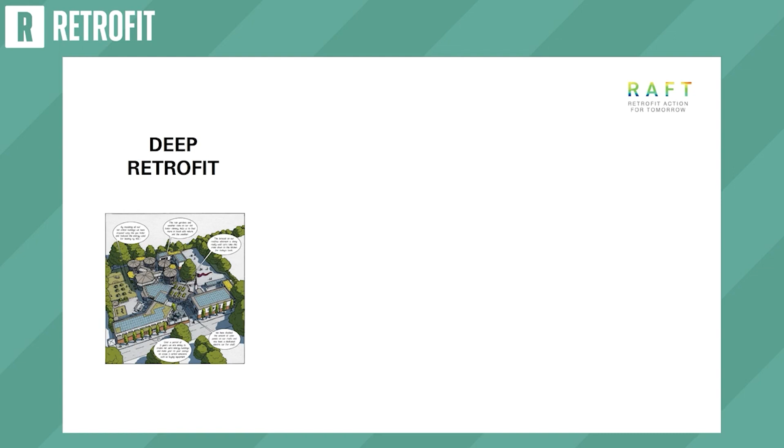So we're a practice of 22 people. We have a hybrid home office working setup. We have employees in Leeds and Birmingham and Southampton, and we're based in County Hall with sustainable workspaces in Lambeth. So you can describe what we do in three key phrases. The first one is deep retrofit, and we deliver deep retrofit projects at an estate scale.

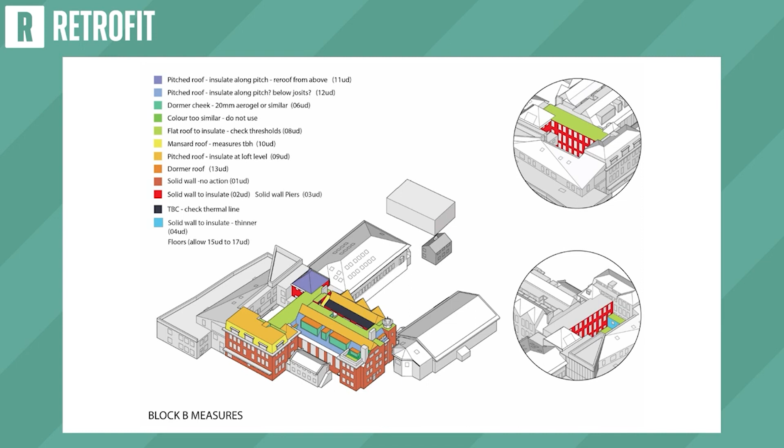This is an example of how we might deal with one block, and this was funded through PSDS1, and we've actually completed this retrofit. It's a whole building retrofit. It's a kind of pragmatic approach. It's not EnerPHit. It doesn't have floor insulation, but it does have moisture management. It does have MVHR. It has repointed cavity walls, cavity wall insulation. Single glazing was replaced with triple glazing, but it was cost effective.

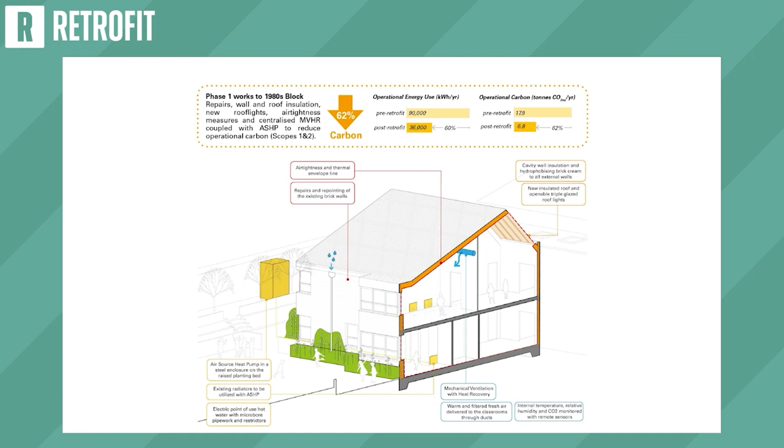It was achievable within PSDS1 budgets with a little bit extra from the council. PSDS1 was more money than PSDS3. It's now lower, so you can't do this anymore. Unfortunately, you have to get additional funding.

And I've put this slide in because we're working right from the estate scale all the way down to the detail, and we really care about repointing. We don't want to be installing cavity wall insulation without making sure that the walls are ready to take it and that we're going to get long-term good building performance. So the second key phrase to describe what we do is community engagement. And I think that this is really a very core part of what we do.

We love working with schools and with children. It's basically fun, and we just feel that we deliver our plans and we deliver them with action research with the children, and it means they learn more, the whole school community learns more, and then we can get a ripple effect out beyond into the community.

And my best moment in 2022 was when a parent called me up and just said, just want to let you know that last night we were talking about retrofit at the kitchen table, and for me that's what it's about. We want to reach out beyond the school.

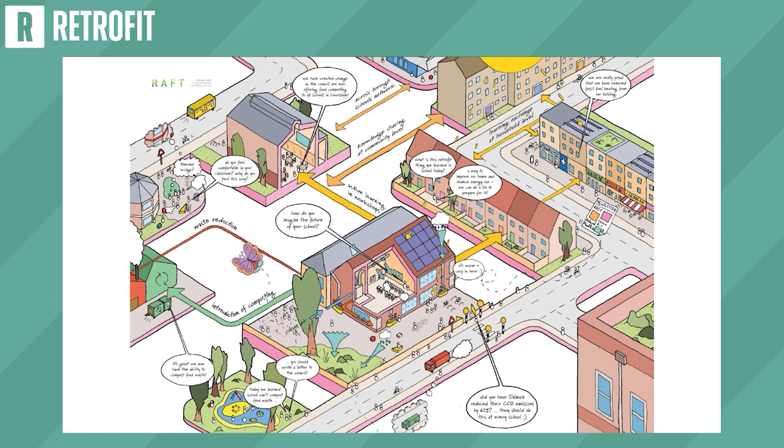We've mapped what that school community sort of looks like, and we're sort of thinking about how we can connect with all these people. And this is a drawing that we did for the recent MacEwen Awards to try and describe the way in which we're reaching out into the community. So this talks about all those effects from the school beyond.

Some of you might have heard about this. This is the Hot Baked Potato Challenge. So this is about teaching principles of retrofit to children with a bit of fun. So we get natural insulation materials, and we get a thermographic camera and a digital thermometer to make it kind of technical. And we teach them basically about thermal continuity and the performance of buildings.

We've got lots of FLIR C5 thermal cameras that we share amongst the children. We've got exercises such as Follow the Heat, where we say, where's the heat source in your classroom? And they all rush off and try and find it, and then we say, right, we're going to follow it. So we follow it down corridors, through rooms, and we go all the way back to the boiler room, and we stand in the boiler room, we say, right, where's the gas coming from?

And then we sort of have this wider discussion about fossil fuels and the relationship of the school to the wider world. We do a waste audit, and the children at this school are still talking about that apple, a year and a half later.

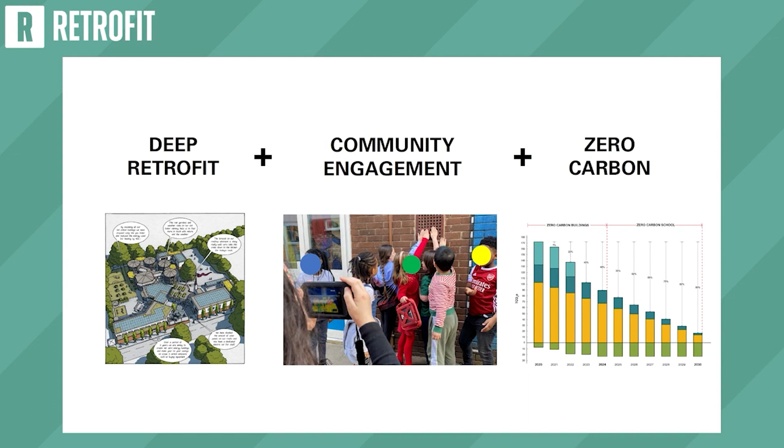So then the final part is zero carbon, and you've got scope 1 as the light blue, scope 2 is the dark blue, and scope 3 is the yellow. The yellow, as you can see, is a really significant part. Scope 3 emissions, the purchasing at schools. So we feel that we want to be addressing that. We're in a really good place to address that and to support schools on that journey, and that aligns with the Ashden Let's Go Zero 2030 campaign, which we support.

I was asked to talk about the genesis of RAFT, so this is a very quick how did this all come about? So it started with about 10 years of deep retrofit experience on domestic properties, and they range from listed buildings all the way through to modern buildings that also are quite problematic. My house is the one that's 1978, and my mum's house is the 1920.

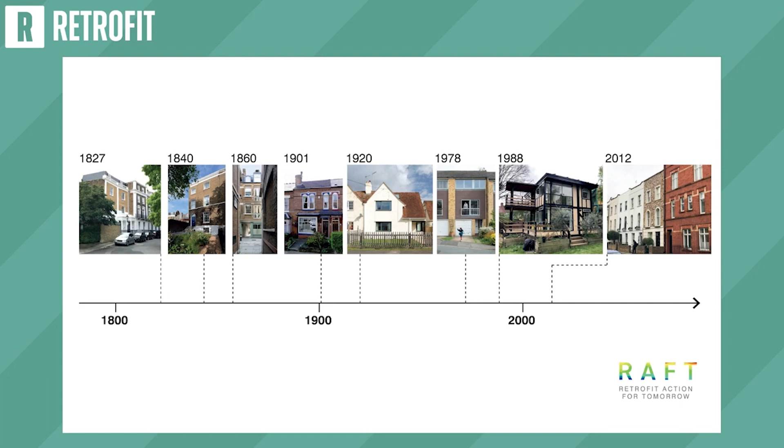And the 1840, some of you might know, it's on the Historic England website, and it was a retrofit. It's Rectory Grove. It's a Grade 2 listed house. And that's actually really where I started retrofit, kind of on that journey.

This is my house. It's a step-by-step EnerPHit project, and we're kind of well on the way. We're actually now net zero carbon. We're producing more energy from our solar panels than we actually use over the year. We have an air source heat pump, so we're in a sort of really wonderful spot at the moment.

He engaged with the retrofit process, and that was the key. I suddenly realized that him engaging with the step-by-step retrofit of the house was a kind of light bulb moment of thinking, wow, we could actually do this with a school, and we can actually engage children, and they do find it interesting. Empowering them to make change in their schools is a good thing, and why should they not understand what pipes are on ceilings and what the build-up of a wall is? You know, it's interesting to them.

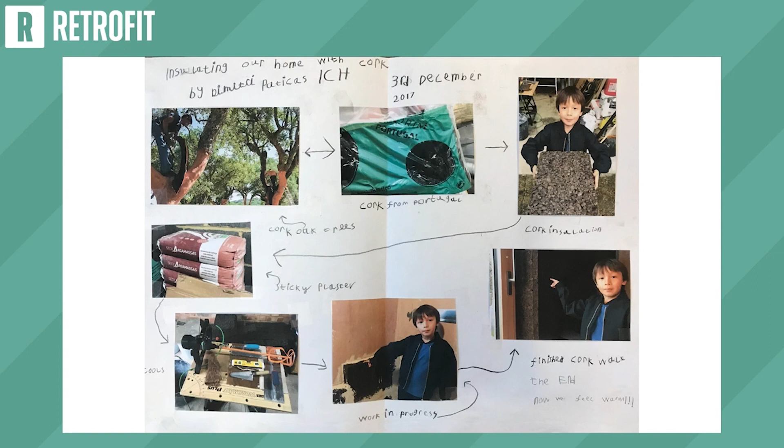We then went on the climate march, the really big one, and our poster says, "Retrofit your home and life." I then started doing workshops, and this is the hot baked potato challenge with the different materials: it's got cork, sheep's wool, recycled polyester and wood fibre, and we just played with them and gave them some basic rules.

Then started working with Lewisham, so suddenly went from working on quite small domestic properties to big complicated schools with multiple periods of construction and much more complex programs. So I was asked to briefly summarize what we're discovering. So this is a sort of romp through things that we found.

The first one that we found is that if we package together what we're calling the RAFT pragmatic approach of medium-term work, so works that are relatively fundable through current funding, we can actually cut carbon emissions by about 60% on a kind of consistent basis across schools.

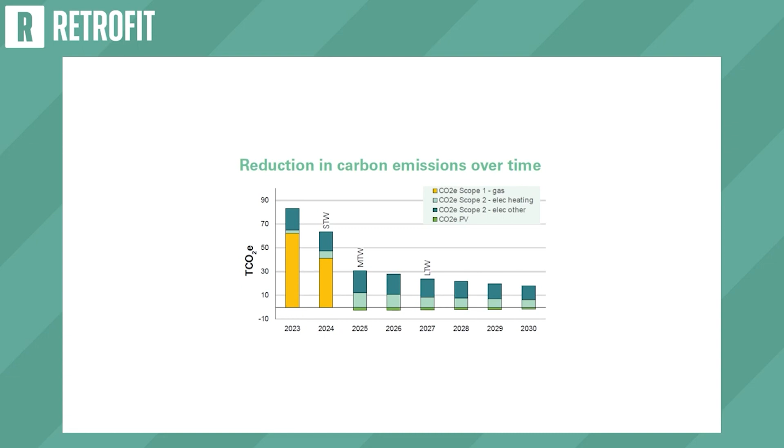If we spend another £1 million or another £2 million, we might cut another 5% carbon, and that just does not seem worth it. So generally speaking, external wall insulation and internal wall insulation are out. Renewing windows, keeping double glazing in makes sense. So we're sort of adopting this pragmatic approach that does significant reduction in carbon but doesn't cost the earth.

We're finding a lot of modern construction is just as bad as anything. This is a brand new roof, and the white is massive air leakage. It's actually holes that big in a warm roof.

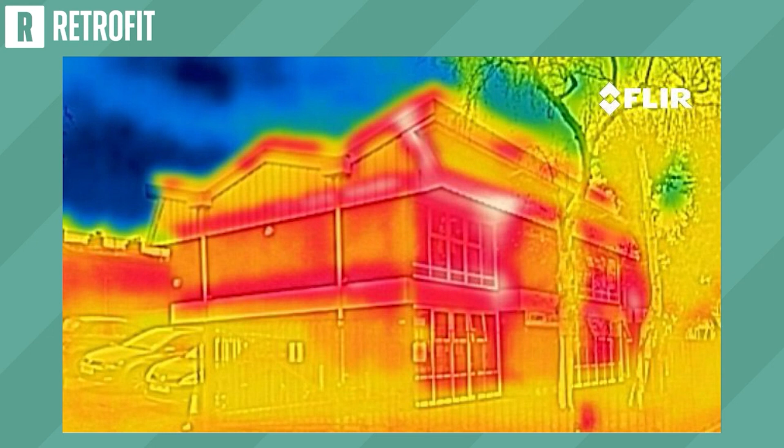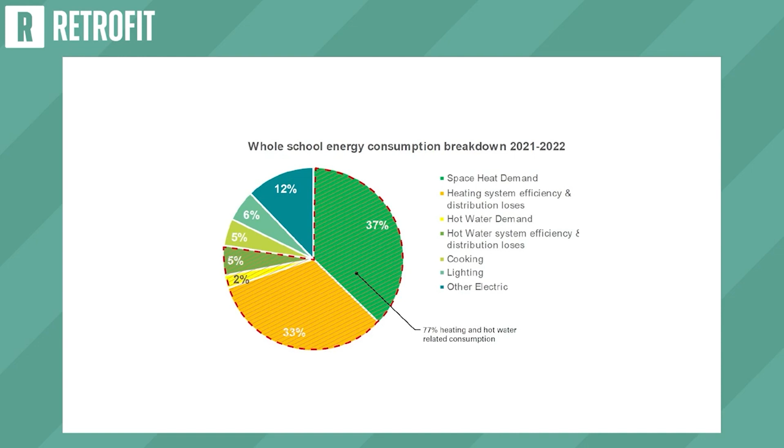So we're also finding that there are really massive distribution losses generally in some schools. They're really rather staggering. We're finding that when we investigate deeper into the building fabric, such as drilling holes and borescopes, we find a lot of debris in the base of walls.

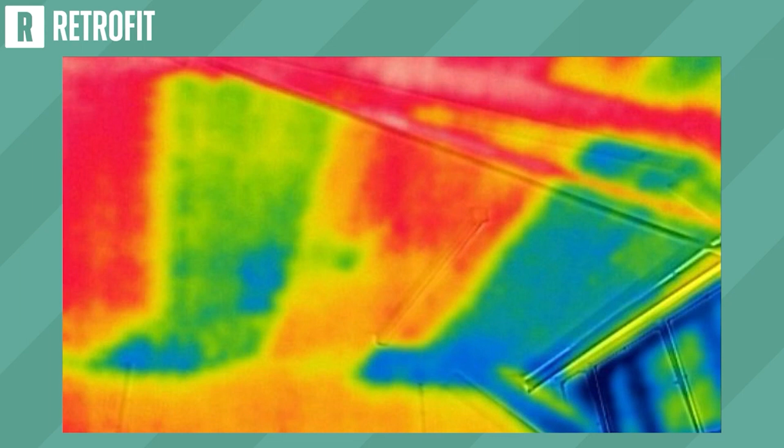So we are taking bricks out, and we are hoovering the walls and cleaning that debris out. Then we repoint, then we install our cavity wall insulation. We're finding hit and miss insulation in roofs. So there's a walkway that wasn't insulated here. We're also finding this. This is very common, much more common than you can imagine. This is services coming in, basically, time and time again, never putting the insulation back where it should be.

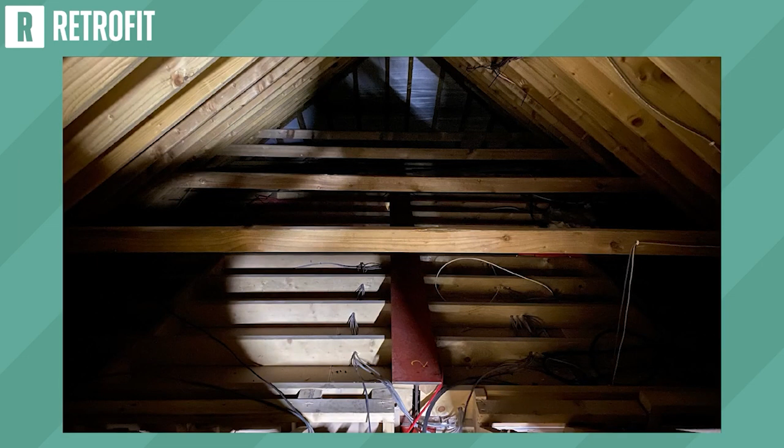We're also finding signed-off building regs buildings. This is only 10 years old. Just the insulation never got in. That's just plasterboard with a room below, and this was signed off.

And what we didn't realise is usually you get unintended consequences. This is a happy unintended consequence, is that this now ventilates the whole school because that window is higher than every other classroom in the whole school. So every room is now cooled through the whole school just through this one intervention, which I didn't anticipate, but it's a really happy event.

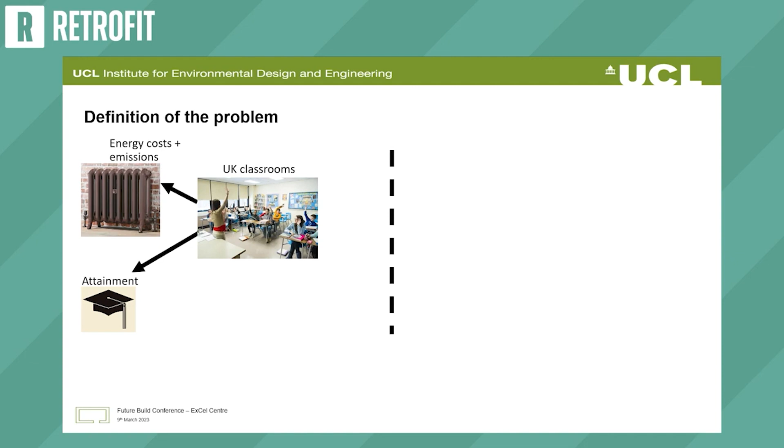Now, what we try to do at UCL is build models, and the things that influence these models are the occupancy of the classrooms, but also the external weather and how the classrooms are set up, which are very individualised depending on where the classrooms are located and how they're operated.

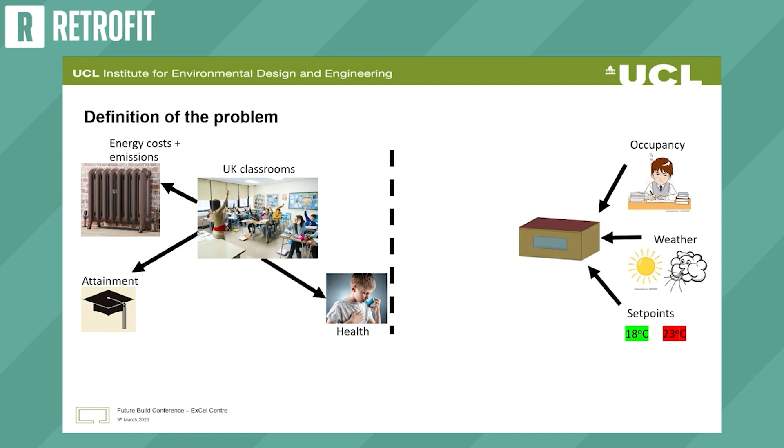So we build models of buildings and run them for a typical sort of year, and that would tell us things like heating demand, which gives us insight into the energy costs, and these are the critical factors for my thesis, if you like, how we quantify indoor environment quality.

I ended up going into this area actually because of COVID, because I couldn't get into schools to verify energy performance, but this is very much something that came up anyway earlier on in my PhD. And basically how external contaminants influence things like health, which we have a separate team within the London School of Hygiene and Tropical Medicine with colleagues there that have helped us a lot with that.

So what models are trying to tell us, the things we need for models, are that we have to have outputs which are relevant for the people actually working in school classrooms. So that would be things like, as I said, energy and IEQ, but how do we give them that information? And then for the models, we have a lot of information on geometry and fabric because we're building these based on national data sets, but we don't actually have much on how buildings are operated in practice and what has been installed, as well, as Harry alluded to with his presentation.

And then we've also got these interactions. So if we look at energy in isolation, then we might not consider that a school, for example, has issues with stuffiness, which means that the windows tend to be open more often than in other classrooms. So we have to consider these things together within the models.

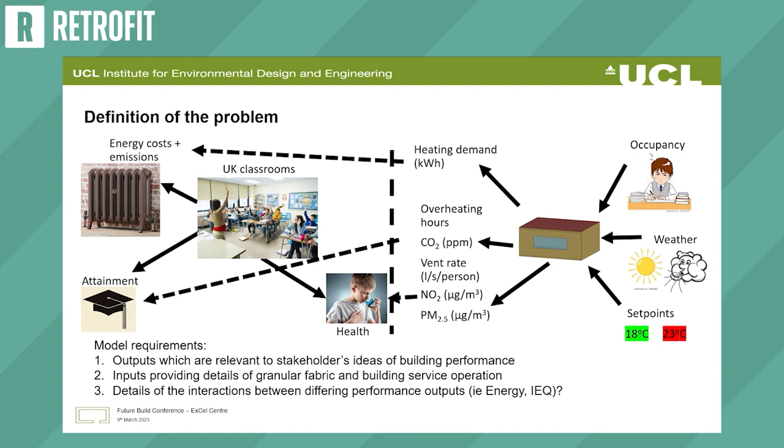So my thesis, if you like, was how models can fit in this gap between school building users and the stock level stakeholders, who are the DfE, Department for Education, local government, academy trusts, construction professionals, and how we can basically build models that better inform these groups.

And what I came to the conclusion with is, if we want to get information, it's a two-way thing. So for school building users, we're kind of hoping that in the future school building users will give us information on how the buildings are performing, and that requires us to actually provide them with information through a process called crowdsourcing, which means that basically they're not just providing us stuff for free. We are actually telling them, this is how your data is being used.

So that works also with stakeholders in the sense that we can't just present them with information. We have to actually ask them what they're looking at and what's going into the models. And we hope that in the future that means that school building users and policymakers are actually aligned through the modelling, if you like.

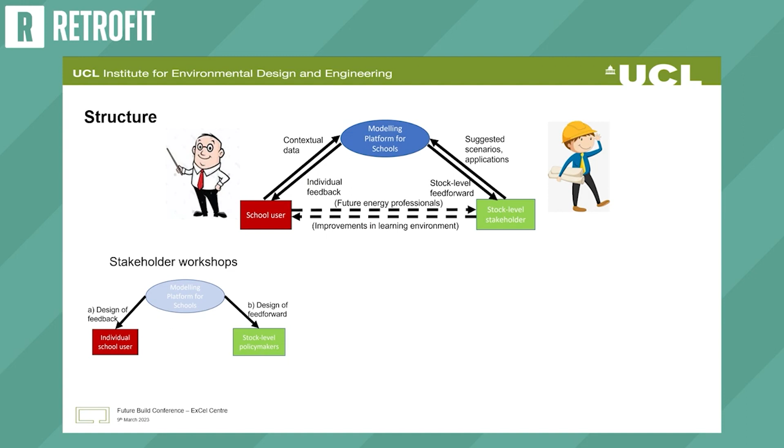So I approached this three different ways. First way was through actually getting out and speaking to stakeholders themselves. So there were the workshops, if you like, to find the motivational and informational drivers.

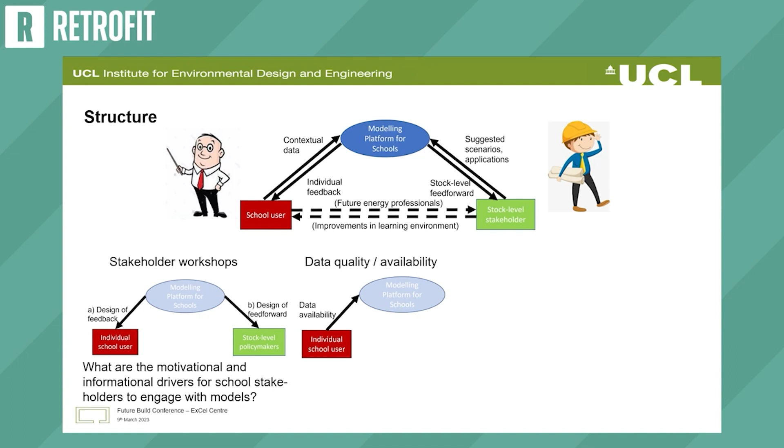In terms of data quality, there was a lot of work I did with analysing existing data sources, but I did also a questionnaire which asked schools about the fabric and the building service operation going on in their schools. And then also I looked at the models themselves and how we were able to provide information out to the stakeholders and the building users, and whether it could show this interplay, if you like, between heating and ventilation and indoor environment and heating.

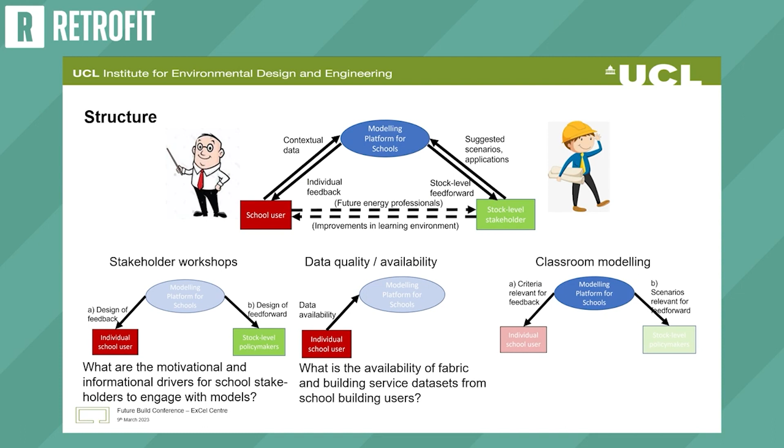So the stakeholder workshops took place quite early on in the PhD, so early 2020, unfortunately, which, as you know, 3 years ago was when COVID struck. So I got 5 schools, different parts of London, and also spoke to 4 different groups.

And the idea here was to just get an extreme set of views, if you like. It wasn't to find a typical group, but it was to actually really build a whole, not huge, database of issues that schools were looking at, and try and get as many different points of view as possible. So these schools are all different types, different phases and different ages, critically.

So there were lots of sort of disparate findings, but I wanted to kind of consolidate a bit for this, so things that are very similar between the two groups. School building users in both groups, at that time, weren't looking at energy use as being their absolute critical thing. They're obviously concerned about it, but schools view it as a kind of attractiveness thing. So if they're a green school, then it becomes something that attracts parents, because parents are obviously becoming more and more concerned about energy efficiency.

Policymakers, actually surprisingly, are in the same boat, because in schools the programme has been to try and replace buildings that are literally falling down, and so they don't really have time to really improve the entire stock. By focusing on this really badly performing set, are we actually doing enough to improve building performance? And in terms of informational drivers, what we can provide through models, what I found was both groups are looking to disaggregate, but in different ways.

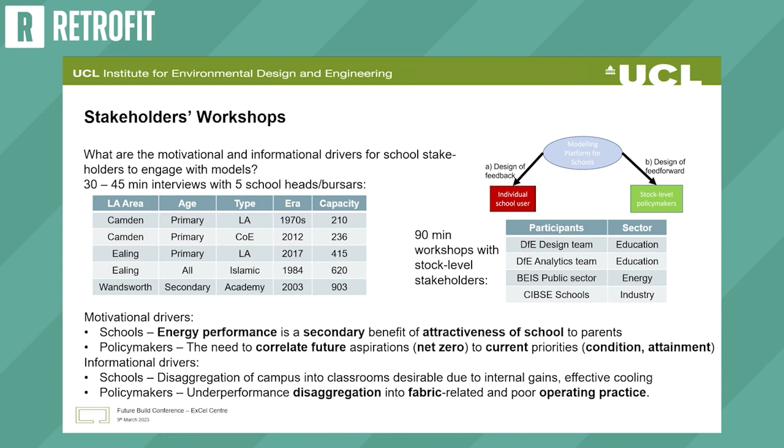So having spoken to stakeholders, my thesis basically then involved looking at what they're able to provide in terms of data. And in terms of the availability of the data sets, I went out and tried to ask through a questionnaire various questions about fabric, and this bit did take place during COVID, so actually it was good in a way, because a lot of schools were suddenly interested in energy through the fact that their buildings were being opened up, if you like, and schools were having to ventilate quite heavily at that point.

So what I found was, this might not sound like a critical thing, but basically, in our models, we have no idea what the typical school day looks like. And the stark thing for me was when I asked primary schools if they're open during the week. Very few of them have evening events and things like that. But actually, most secondary schools do. And somehow we need to make that part of our modelling more, because those activities are the ones that potentially skew the energy use, because they involve things like sports classes and potentially, if they're open at weekends, things like catering, which are quite heavy uses.

So the point is that building users were able to contribute that data, and if we can better use it in the future, we can build more reliable models, because we can show how much of the activity is school day activity and how much is because the school has decided to essentially rent out their building.

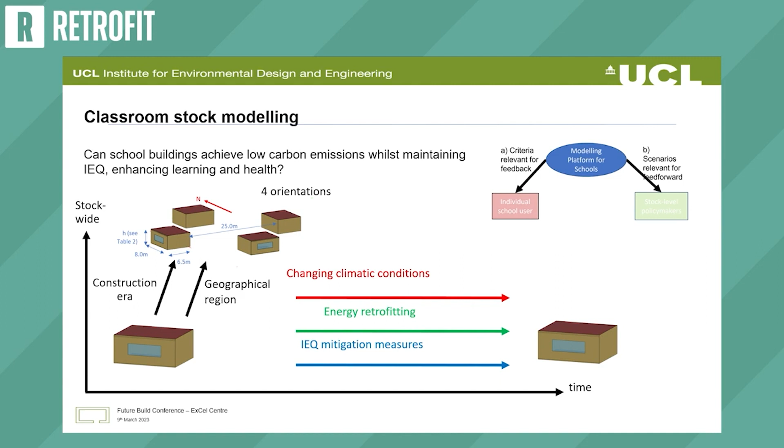And I wanted to do it in lots of different types of classroom, but also considering different construction eras and geographical locations across the UK. So I created this model in EnergyPlus and basically scaled it up in Python to include lots of different scenarios and also settings.

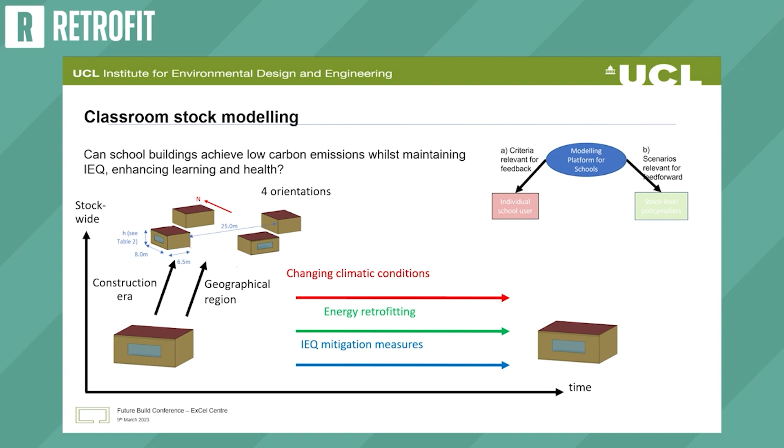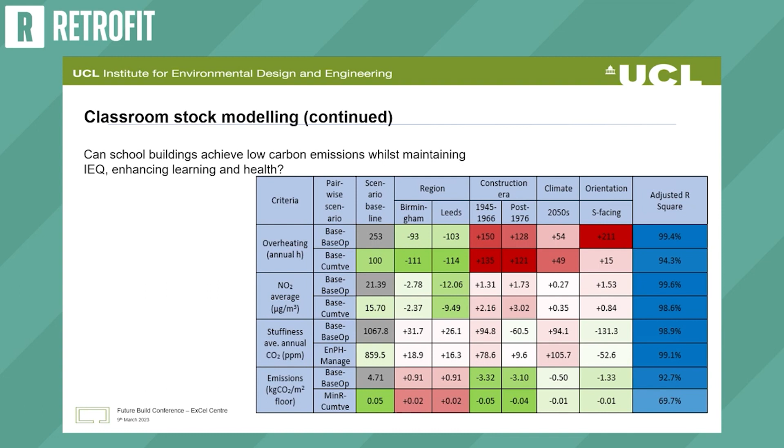And for each of these, I have a kind of current scenario, which is this base op, and also when I ran lots of the scenarios, I came up with a best case, if you like. So this was a mixture of best case retrofit and best case operational scenario. And what this essentially shows along the top is different features. So I ran different models 30,000 times, and basically I carried out some sort of regression analysis, which eventually showed a few things.

So one of the first things was that although you can't really fix orientation, it becomes less of an issue on overheating as you become better at ventilating the building at night. So what I'm trying to say there is, if you've got problems with a south-facing classroom, there is potential that could improve, so that orientation becomes less of an issue for overheating relative to other features such as the actual construction of the building and also the region of the building. So that can be reduced through the measures that we suggested, which involved shading and albedo and night ventilation of the building.

For external contaminants which were brought into the classroom, what we found was that modern constructions are actually slightly detrimental because they keep the heat better, so we need to ventilate them more in the summer, when in the mornings, for example, there's a lot more NO2 through traffic and so forth. And then another finding from this work was that the construction era and degree of retrofit are quite important for the emissions, which is obvious, but actually they're more influential than other features as the building's improved.